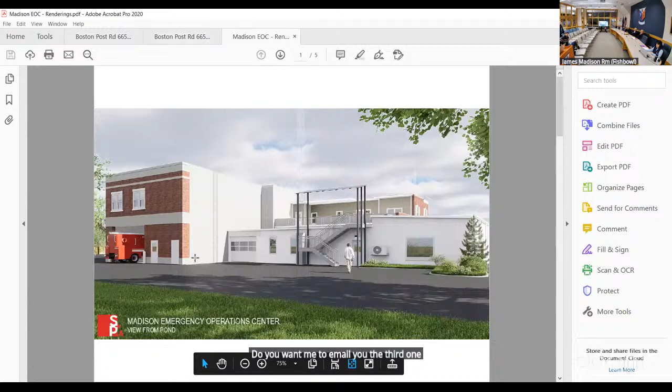You want me to email you the third one? Oh, you have it? Okay, there's the rear - that was the original. You found the rear of the new rendering now? No, you want me to send that one to you? Yes, I don't have that. So that was the original, and this is the new one.

If you have that animation, you could give her that. I do.

Besides that western elevation we were talking about, that's something that might be a final design element we're working out with the firehouse folks. Yes, they love this design, they've signed off on it - I think it's a good complement to their existing structure. What am I looking at?

While we're waiting for that to get pulled up, did you guys by any chance do a rendering using a lighter colored brick? We did, actually - Mark created both sets, one with all dark and one with all light. The all dark was unanimous as the one to move forward to the group.

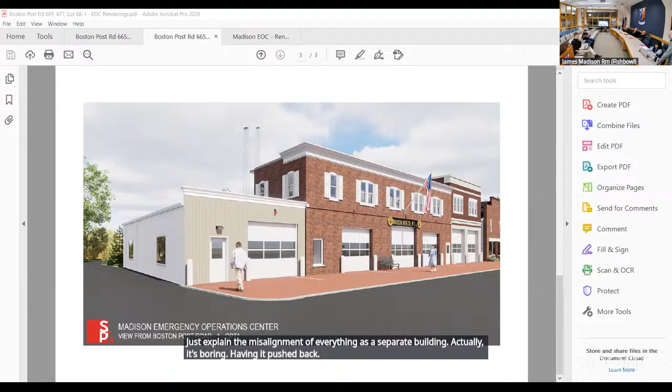How far back is the building? I don't know, is it one - four inches? Four inch, yeah, so I thought it was half a brick.

Yeah, 8 inches was too much. Any further, it would block. Right, I understand that.

You know, the details, the profiles are maybe just a little heavy, but... You mean the white part?

One thought I could speak to while you're trying to find that: as far as around the corner with the metal siding, you guys could carry that masonry exterior even 4 feet back, just enough so that the metal doesn't become part of what people really see from the street coming down. Also, do you have a profile picked out for what that metal siding profile is going to be?

It's flat. It's a flat panel, a Kingspan flat panel, 3 foot wide metal panel. Yeah, that's good. You'll see vertical seams, but it won't be corrugated.

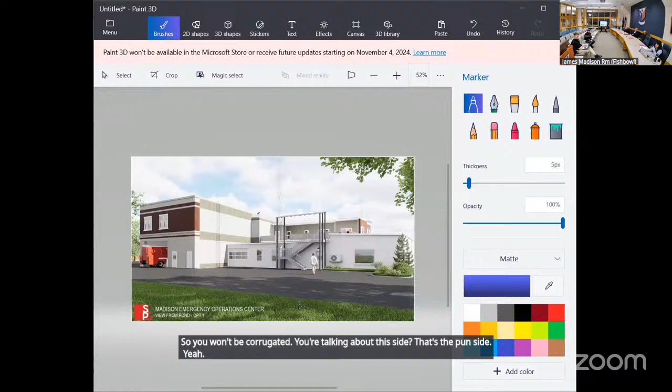Are you talking about this side, just around the corner? Yes. On this side, that's the pond side. Yeah, I can see that in the back. That's the back.

You were speaking toward the alleyway, east. Can you go back to that? I don't know how far you gotta take it, but I'm thinking maybe as little as 4 feet, just so the building has a real corner - it doesn't look like a facade stuck on from that angle.

That's a good point. Yeah, we actually were toying with that, because we were trying to figure out, going with that kind of slightly more modern look we were talking about. We debated back and forth about carrying the brick around, and then landed on - well, if we're gonna go for a little more modern, since we were still pretty traditional with that style, maybe if we have that metal panel poking out it gives it a different feel. Not right or wrong, that was just the thought process behind it.

I don't know, it's... Can I ask a question? You see the art gallery next door to the fire station? How far is that building, the front of that building, behind your new addition? That's roughly aligned with the existing facade.

Okay, so it's still proud? If it is aligned, it'll be 4 inches proud of the new addition. Okay, that's good.

I'm guessing they're gonna be red indicator lights above the doors of the new facility. See if it goes down the corner. Yeah, a little bit. You need at least a couple.

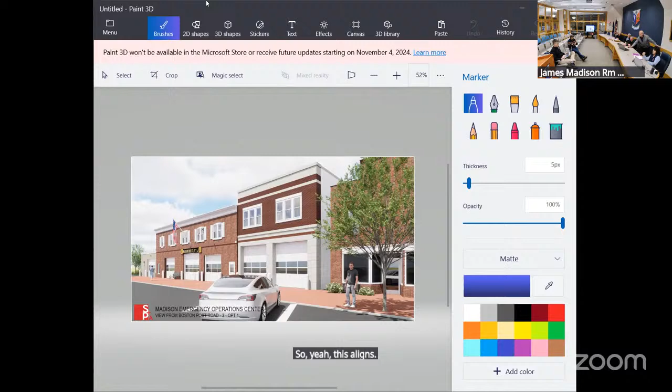So this aligns up with this. And what's that little white block there, right in the... That's an existing piece of stone or cast stone that terminates it. Oh, really? There's one. Interesting, good.

So this is the white siding on it. Sam just said there'd be red lights. I don't know, somebody asked about lights. Yeah, there are red lights on the corners like we have, red lights over these doors. We can add lights here as necessary.

I think we would mimic whatever is here. I think it would look right on this, which is a little tougher from one model. Does it need it? Where would you put it?

No, I would carry those details, just wrap them around the corner - the same thing as the front, just make this edge longer. Right now it's 2 feet, so it returns 2 feet back from the front of the street. Okay, well it didn't read that wide, so that's good.

One other question - could you go back to that front view for a second? I'm sorry you can't see this, Alex. I know, I'm trying to figure out a way to show the camera - you see there are light fixtures here. I think one of those red lights warns people that somebody's about to come out of the garage.

Does it make any... I mean, I'm tempted to fiddle with the width of that intermediate band of bricks.

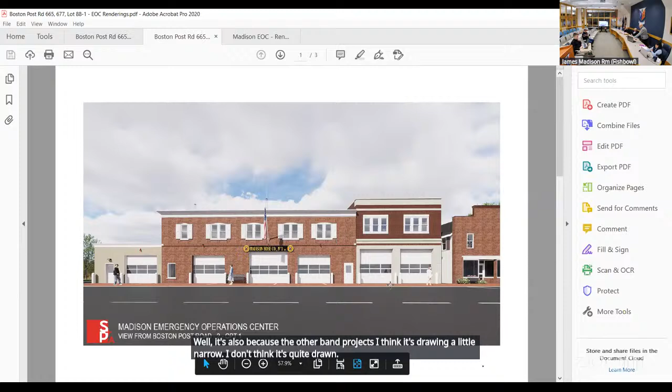I think it's drawn a little narrow. I don't think it's quite drawn right, because it doesn't align - it's a detail. That's why, basically, that's why I'm asking, because it kind of looks like it's a hair shallow. So we would match what's there.

I think the brick on top of the door is an important feature. I like the red. I do too. I like the red a lot. I like the color, and the way it's rendered - it's beautiful.

I kind of think you probably want a mortar that's blended, not matching the brick exactly, but something a little darker. Red with a good red pigment. And you are confident that these are darker than what's existing? Yes, and if it's not, we can use Belden and Glen-Gery, because this is what we want.

What we were trying to do was match the dark red, because this is a mix. It has some brown in it, some sort of pinkish gray, which was the lighter color that I didn't like. I like the tougher, dark purplish tone. If we have a little bit darker mortar, I think it'll be darker anyway. But I think it's not quite as purple as we want.

You don't have a sample of that white in the blocks? It's precast. Do you have a sample of it? I don't have one. Is it that white or is it that white? It would probably end up being like a... so it's not a bright white? It won't be a bright white. Okay, this is bright white. There's usually a few different tones to that. This will be an off-white, a very light one. That's the color.

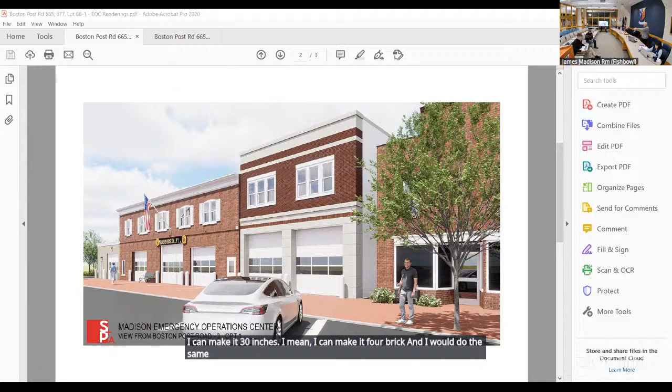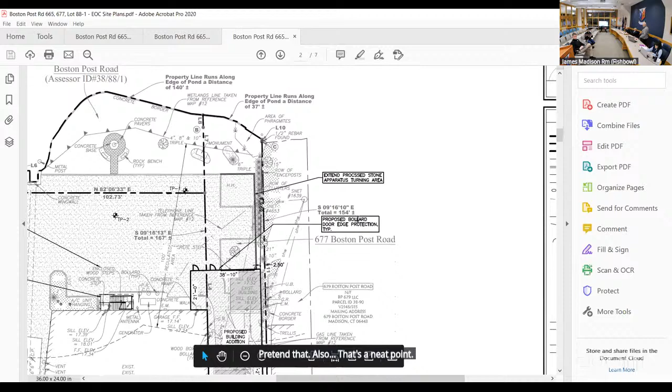Go on, talk about the back a little bit. I think we're good with the front. I guess we're good, we're good with the front.

We got a glimpse of it, I don't know if you have anything you want to show us. Pop that back on the screen just so the guy can see too. She has the rendering of the back, Mark. She does, she can put it on the screen. Hey, I appreciate that, thank you.

Nobody even knows it's there. No, the firehouse is just a wall with doors, trucks drive through it. Yeah, we were talking about it. Nobody knows it's there. You can see it from the back of the parking lot, from the post office, and probably from the boardwalk. Even when you walk the boardwalk, you don't notice. You really don't look.

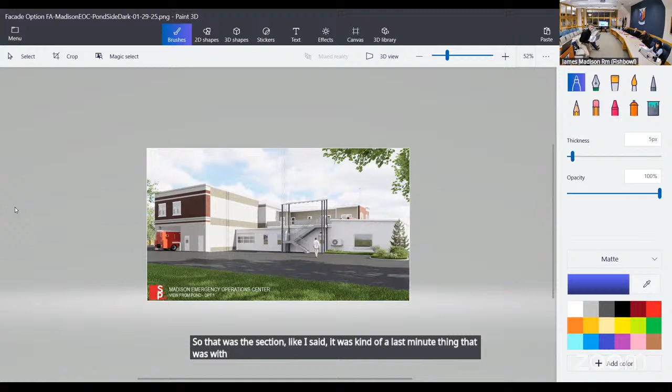You see this little section. That's it. Yeah, so that was the section, like I said, it was kind of a last-minute thing to incorporate some sort of clapboard into it, possibly right above that door to the right there, that's the stair tower, fire stair, putting 2 windows in there.

Just to break it up, I think their intention - I didn't get a full answer on why they wanted that, but I think it's just to break up the monolithicness of that wall. Remember last time we displayed this, it didn't have those bands of color, it was just flat. Oh yeah, it definitely looks better when you've broken that up.

My fear was over-clapboarding when they said, hey, can we make that wall all clapboard? Yeah, right, you don't want just a 2-story. We talked about actually making these bands be the clapboard and Hardie board in between, so we had 2 different textures on the face of the wall that would break it up. We've got the 4x8 Hardie board panels and clapboard Hardie board in between, with a gray that matches the gray that's there.

Again, the brick, the bands, the precast, it's all the same front and back. This is the EOC side, this is the emergency operations side, so we thought it was owed something as well.

Is that a new fire stair exterior? Yeah, right now there's a wood stair that's in wretched shape. So that's a steel stair, it's got to be covered. This is actually showing a little higher than it's going to be.

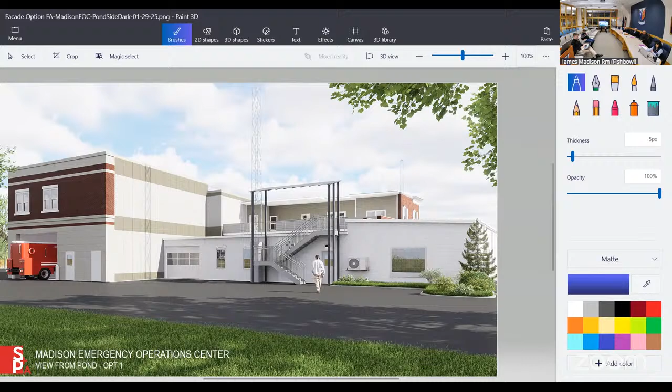But it'll be — I mean, it's shown right now at like 11 feet, but it's going to be 3 feet lower. So you won't see it from the street. That's a solid tread. We all know the snow won't pile up on the stairs along with that roof way up there, will it? So, shovel. Okay.

All right, but so Maria, this is an application — they probably want to get our help on this moving forward, right? Yes. Alex, do you have any other questions or comments or concerns?

Sure, I was going to say, I'm struggling with the red brick. That was my initial impression, but I'm not there in person. And Matt, I trust your architectural experience on that — your thoughts, it works?

Well, I think the sample we're seeing is really good. You never know with a brick until you build a mock-up. But I like what I'm hearing from Ben and his representation of what the building committee and the fire department want — they really like the richness of it. So I'm not worried about them veering into a lighter brick that would clash with the old brick. Whether it's this brick or one very similar, the mortar selection is something that's got to happen on a mock-up. I'm hopeful they'll keep it rich rather than having a washed-out look, which I think is better personally.

How do you feel about the dark brick though? Well, on the rendering on the screen, when I first looked at it, it looked dated to me, but of course that's the monitor. So, to your point, you really don't see it until you see it in person — I'm sure it was a different color on the monitor versus the sample we saw, which didn't look as rich as it does in person. The monitor looks a little more purplish than our sample here, which is very terracotta, dark terracotta brick — a mixture, and not purplish at all. It's a mixture of dark and light terracotta.